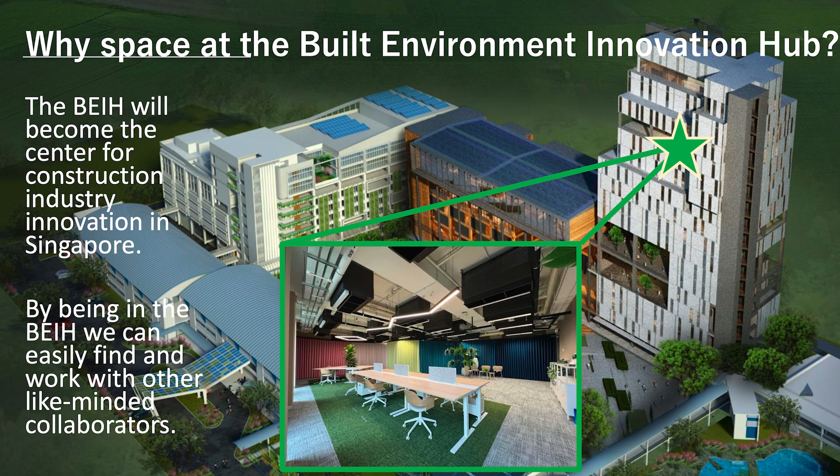We're part of the Built Environment Innovation Hub. We have our office just over here on the 12th floor. Why do we choose that? We believe the BEIH is really becoming the center of construction industry innovation here in Singapore, and we really wanted to be with like-minded collaborators. I think today is a classic example of that. Other than my BCA colleagues, I probably had the shortest transit here as well. But it's living proof that we can be here, have more conversations, meet more companies - it's really a thriving ecosystem.

In addition to the space, we decided we didn't want to build up our own massive team of researchers here. We really wanted this to be a partnership approach. Singapore has some excellent, amazing IHLs, probably more than we could ever partner with. We started off with partnerships with just two: Nanyang Technological University and the Singapore Center for 3D Printing, and SUTD, the Department for Robotics and Automation. So we have two programs - R&D programs and deployment programs. We're looking at what we can do now, what we can do over the coming year or two, and how that's really going to transform the industry over the longer term.

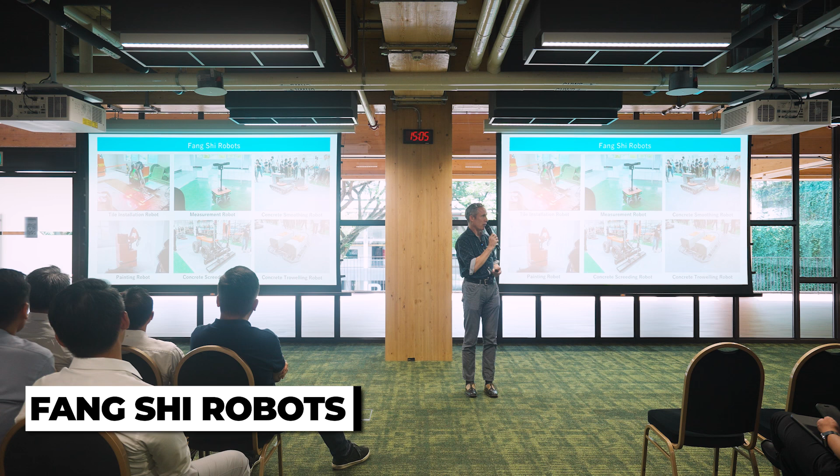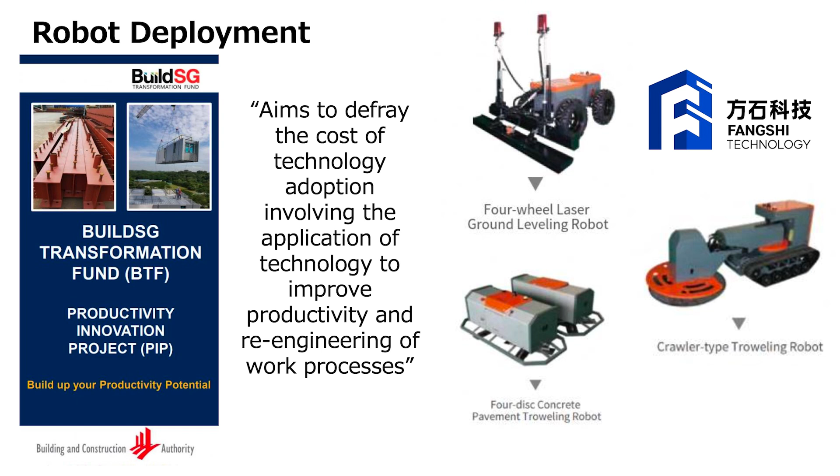Talking about our program with Fangshi, these are a few of the Fangshi robots that they have. I don't think you'll see them here today because we're going to be one of the first companies to bring them into Singapore. We're leveraging the Productivity Innovation Project, a BCA initiative to help accelerate technology adoption. For us as a contractor, we have our customers, we have our own priorities, and myself on the innovation side, I love to drive these new technologies. But convincing people on the ground to adopt these can take some change management and adoption. So the Productivity Innovation Project really helps us jump over that barrier and say, okay, let's give these new robots a try, let's bring them in.

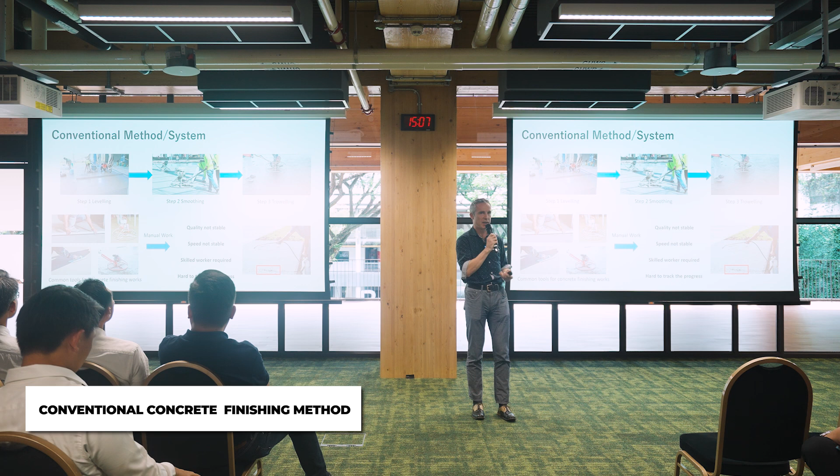This is what you'd see as the traditional method of laying concrete - leveling, smoothing, troweling. Each of these jobs requires a different specialist, and it's not something you can train overnight because a certain feel for the concrete and the machines is required. So you require skilled workers, but unlike what I'll show in a minute, the skilled workers to operate 3 different robots can be trained quite quickly, whereas training specialists for this type of work can take years to reach a good level of quality. Even so, the quality may not be stable, the speed may not be stable, and it's hard to track progress - you're going back to manual tracking.

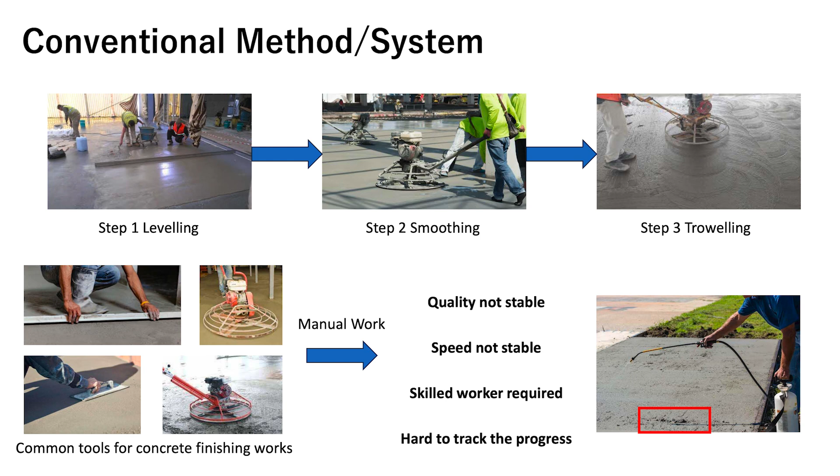By comparison, by adopting these robots - we have 3 different robots - what we're hoping to see is an increase in quality, or at least stable quality, and speed stability. Of course, the robots, common joke, don't take breaks, don't take MC. And although it requires skilled workers, we just need 1 or 2 skilled workers to operate all 3 robots.

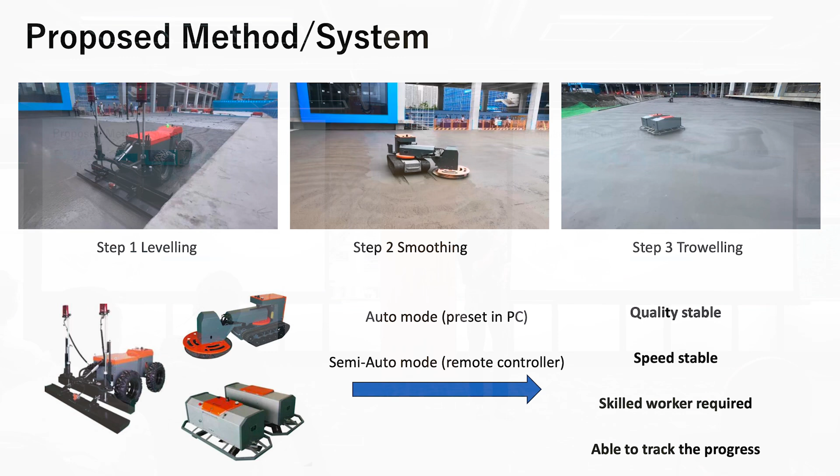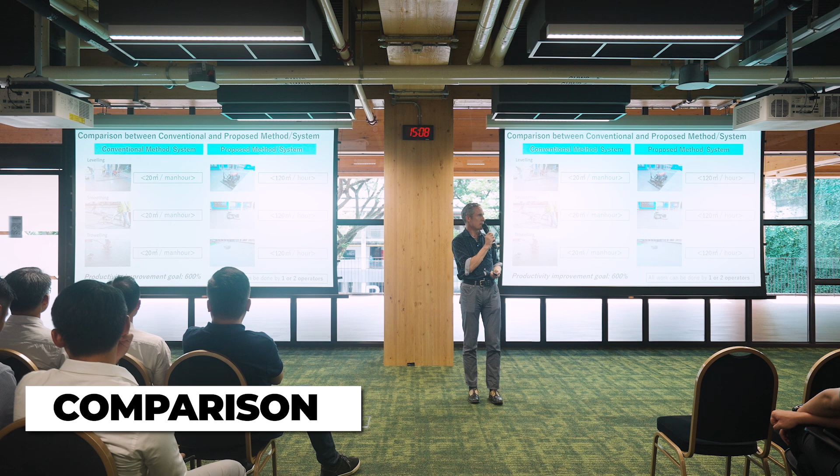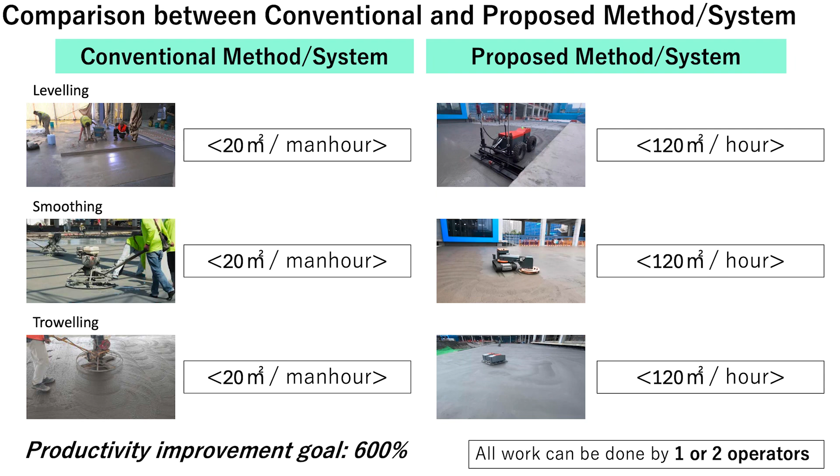So these are the productivity improvements we're hoping for, 600%, roughly 20 meters squared per man-hour for each of the manual tasks. And we're aiming for 120 meters squared per hour for the robots.

Now, although the technology for robots is developing very fast, there's only so far you can get with robots. A work site is a work site - it can be dirty, there can be uneven surfaces, there may not be Wi-Fi or signaling. So what we're going to do is take a step back and look at what you need to do on a work site to make it robot friendly. That way we can modify the design process, and also modify the work site, to make sure we can take advantage of all this technology coming in.

Secondly, beyond that, in order to automate fully you need a robotics middleware framework - a way to make all these robots speak to each other and to the elevators, and be able to program them and take this to scale. We have a subsidiary called Plybot in Japan, where we already do this in manufacturing and logistics, and longer term we hope to bring that to the construction industry.

And then longer term, we may look at reconfigurable robots as well - there's a lot of talk about this, and it's one of the specialties of SUTD. I think everyone knows about the cost of adopting robots, so the more jobs you can have one robot doing, the more efficient it becomes, and we hope to go in that direction as well.

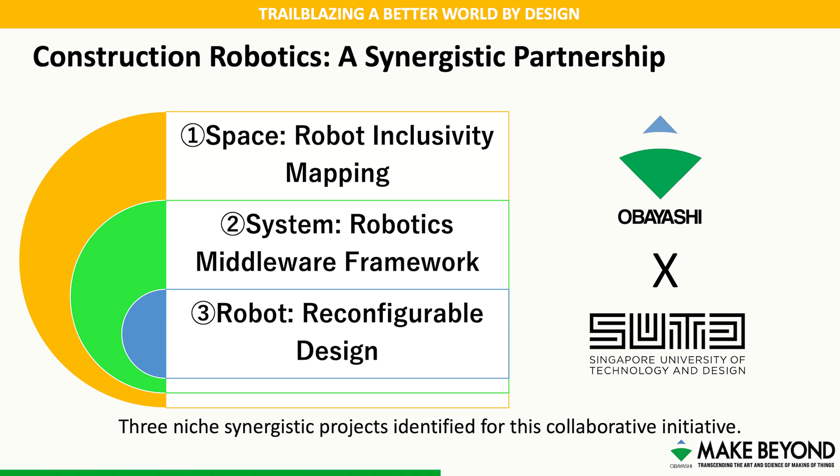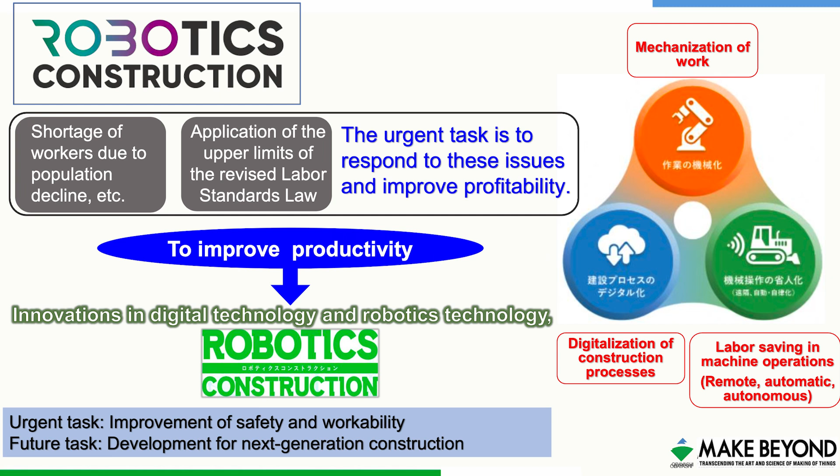Okay, so this is just a quick overview of our robotics construction philosophy, originally from Japan. But we face the same issues as we see here in Singapore - a shortage of workers. We also have regulation in Japan, not related to foreign workers since we have fewer foreign workers there, but related to the number of hours people can work on site. So the drivers are the same, and we've been developing these technologies for decades.

There's a few technologies we've brought over to Singapore. We're working with HDB on the Garden Waterfront in Tengah. A lot of different technologies have been developed or rolled out on this project, but one of them is the autonomous crane, which basically operates with less human intervention.

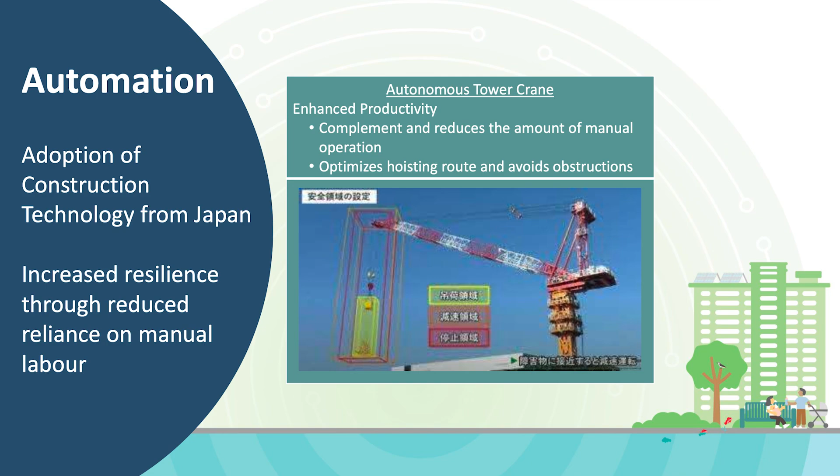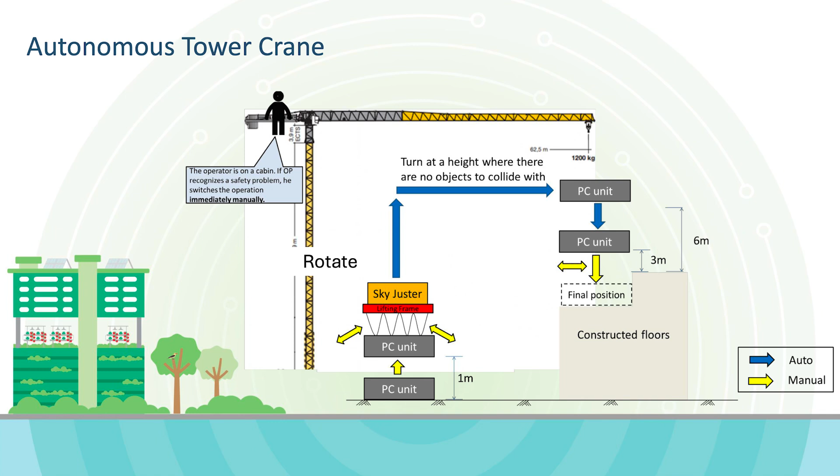You can see here you still need an operator up at the top, who has a kind of kill switch in case of emergencies. But the blue lines show the automated parts of the process - taking up the units and placing them close to their final position, where the manual operation then takes over to place them down.

So this is an example of the interface you can see - you can see exactly where the unit is being moved to, and you can do the automated stopping.

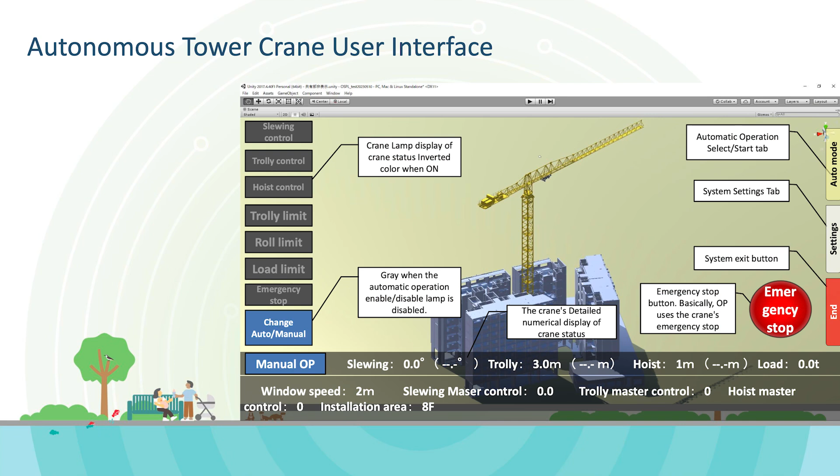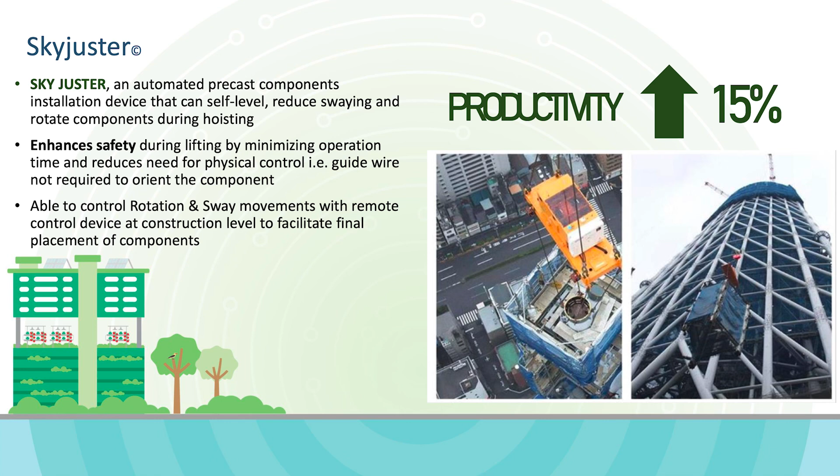The second part of this technology is something called Skyjuster. This was developed for Tokyo Skytree, the world's tallest tower, because as you can imagine there's a lot of wind up there. It has a gyroscopic effect which controls the movement of the load and allows you to redirect it and place it on site. This has been a really time-saving technology for us, and we're hoping to find more use cases for this in Singapore.

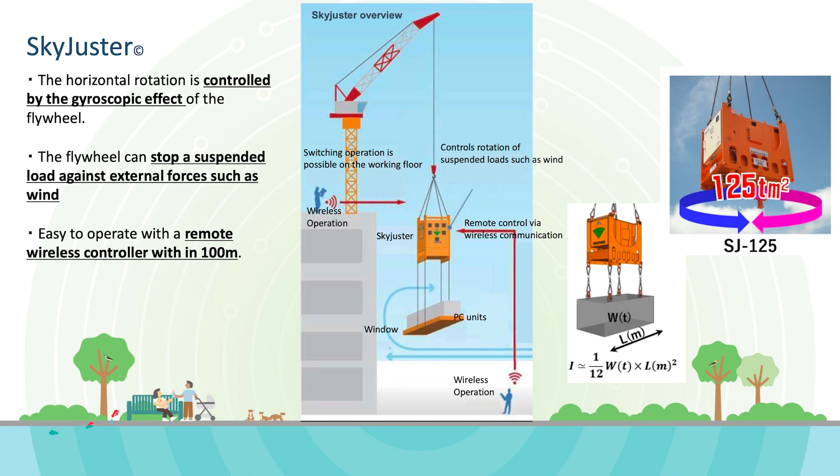So that's all from me. If you want to connect, learn more about OCLS, or connect with myself, please do - this is just the start. Thank the BCA for all their collaboration so far, and we're looking forward to building Singapore together.